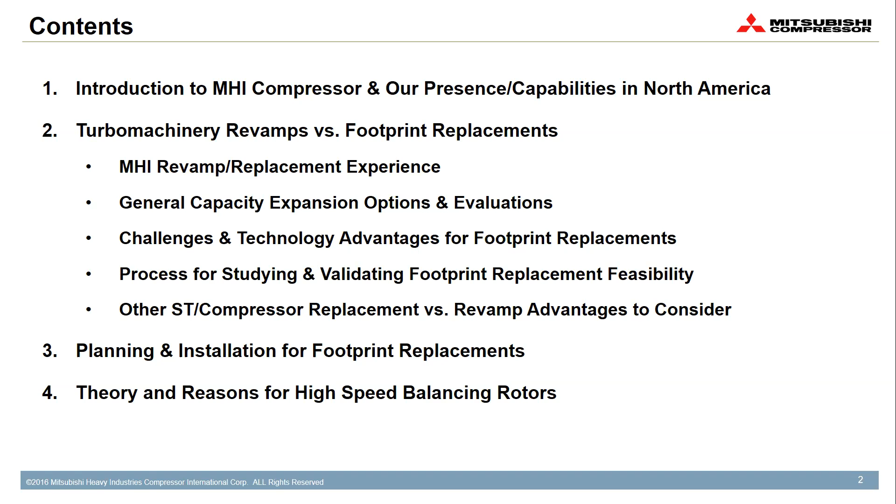All right, so we always throw this up just because Mitsubishi is a large company, but it's a large company of a bunch of different companies. There's actually no Mitsubishi head company. Us, the compressor group, we fall under Mitsubishi Heavy. They've got multiple domains. So we've got the power group, Mitsubishi Power. You may run into those guys. They've got a facility here as well as in Japan.

We've got, like every other big company, we've got government for defense and space systems. We've got our own company that does carbon capture. So they've got their own engineering division. So MHI is really who we fall under, and there's quite a few underneath us.

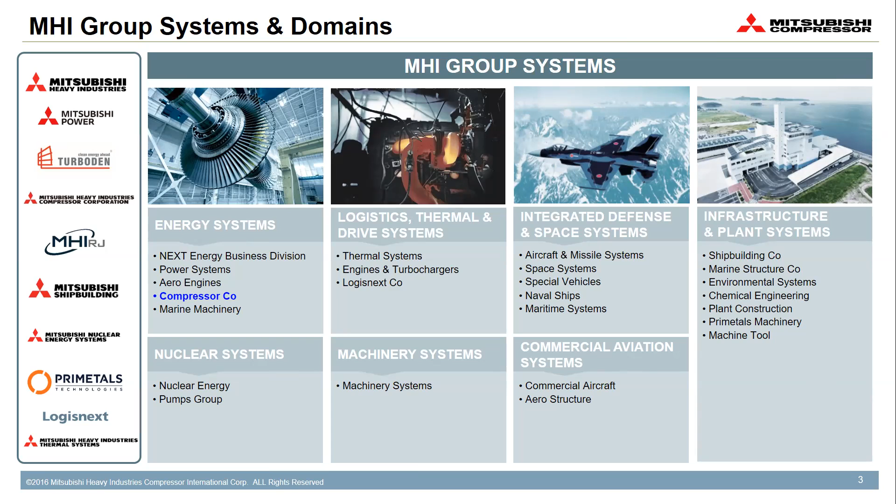All right, so I think most of you saw these out there, but this is what we build. We've got the API 617 type compressors, API 612 turbines, 617 Chapter 3 geared compressors. And as I mentioned, we've got a sister company, Mitsubishi Power, who also do gas turbines. So we do vertical split compressors, we do horizontal split, whatever it may be.

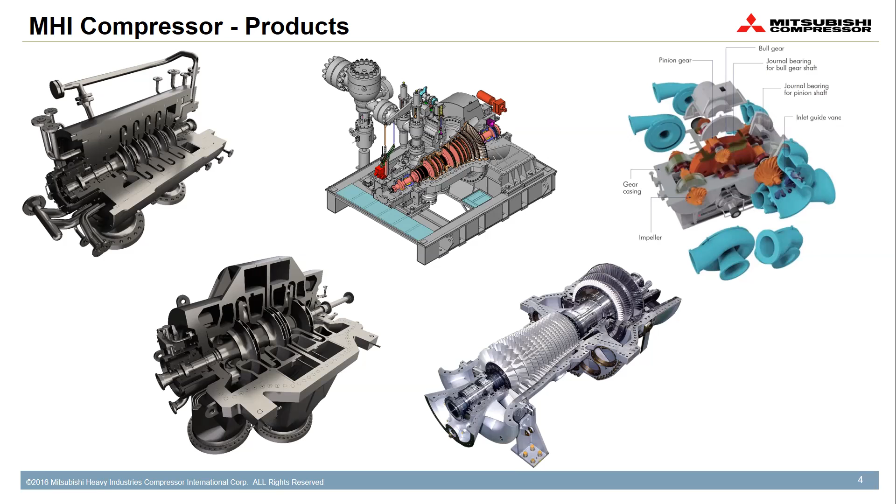So this is really our global footprint. So we've got obviously the factory here in Pearland, which we opened in 2015. Shortly after the big shale boom, we put a ton of machines out into the states all over, but mainly Gulf Coast. And so we had to have somewhere to service everything. So we opened this place up in 2015.

We've got our main factory back in Hiroshima, Japan, which is quite large if you compare it to what we have here. But yeah, so we've got about 860 people there sitting in Japan on the factory side, as well as engineering throughout the plant. We've got in London an outfit for sales, marketing.

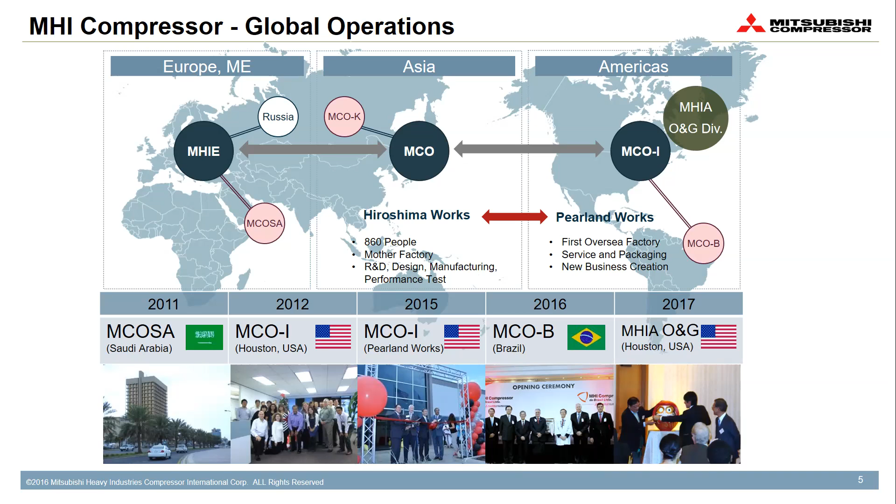We've also got down in Brazil folks calling on people down in South America, and other entities in Korea, Saudi Arabia, and then we've also got something in Russia.

So we're vertically integrated in the sense that from start to finish, we've really got control of our own destiny. But the key thing to point out here is MHI Group has its own foundry. All the MHI group companies use a single foundry that's in Kobe. So we'll get into something a little bit later, but that's kind of the key thing to take from this.

But moving throughout the whole process of building a machine, from the first casting through the machining, assembling, testing, all of that's done under our own control. We like to highlight that because it's a big differentiator between us and our competitors, where most have taken the methodology to start outsourcing a lot of their large castings, et cetera. We've been one of the few OEMs to really hold on to that. It plays into today's discussion because it does give us some flexibility when you're talking replacement of equipment.

Rotor forgings as well, or just the casings? Mainly casings, but we do get from our own company some of the sourcing for the rotors, yeah. So you have forging capacity too.

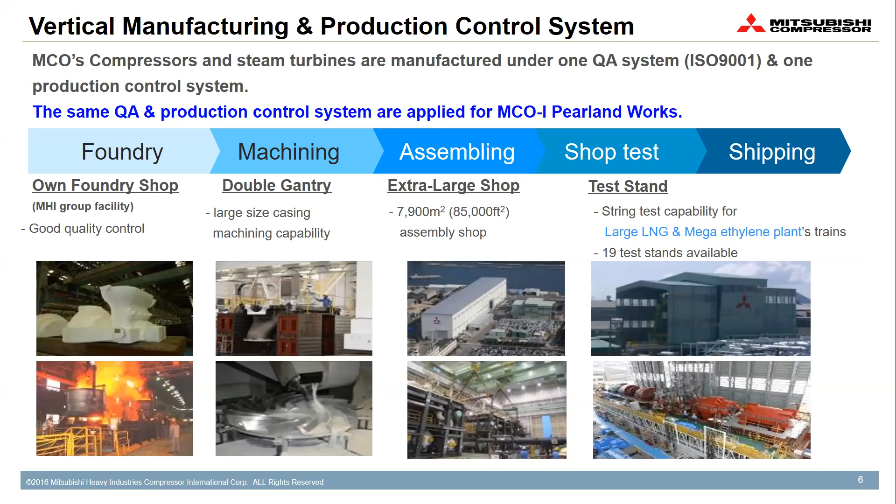All right. Yeah, we've gone through these two here. You saw everything. Kind of just capacity for what we do here. New unit packaging, you saw the test stand. We can do manufacturing on stationary and rotating parts, whether it be steam turbine, whether it be compressor. We're doing repairs, we're doing overhauls on machines, TTV overhauls.

We've got welding capabilities for pipe, as well as repairing the casings and things like that, or the shafts, whatever it may be. Is it any make of trip valve as well? For sure our own, but if a Gimpel valve comes over here, then yeah, we'll take a look at it too. Yeah, we've overhauled one or two Gimpels now. It's important to point out, right? The Mitsubishi TTV design is quite similar to a Gimpel TTV.

Did you have an overspeed? Yeah, so we had impeller overspeed, we had low speed, and we had high speed balance, but above-ground high speed balance. And then, of course, storage was over here for all the big rotors.

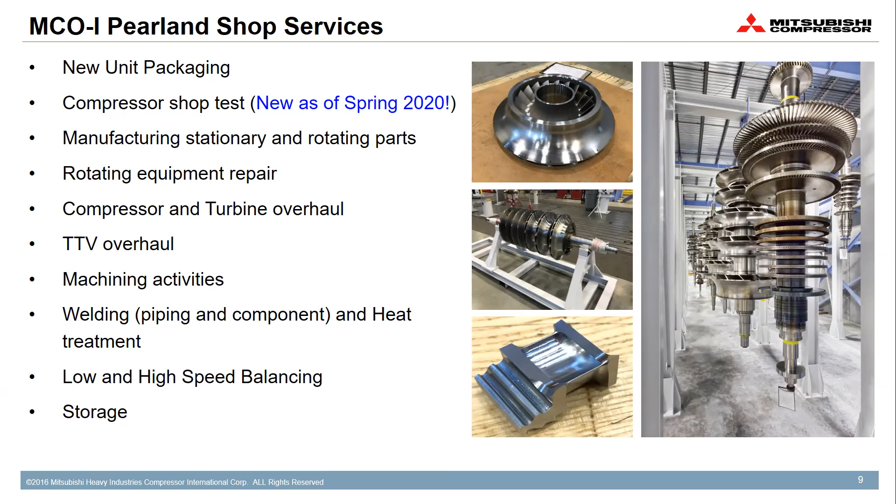All right, so as I mentioned, 2012 was a big boom for shale gas, and that's when a lot of these big orders came out. So the growth was, call it exponential from that time for when we put in new machines. So 2012 to this day, we put in over 200 machines out in the field, steamers and compressors. This is just in North America.

So mostly pipeline? It's ethylene, ammonia, LNG. Those are the big markets we get in. Pipelines, certain manufacturers got a pretty good grip on the pipeline.

Yeah, I don't think we've got the slide in here, but generally speaking, biggest contributor to our business is ethylene and petrochemical. It accounts for probably around 40% of our market on any given year. The next largest chunk is in ammonia and methanol, traditionally for fertilizer. Now we're seeing a shift for transporting hydrogen, but ammonia probably accounts for another 20% of our business. Then the remaining 40% is a combination of upstream, midstream, and other downstream applications.

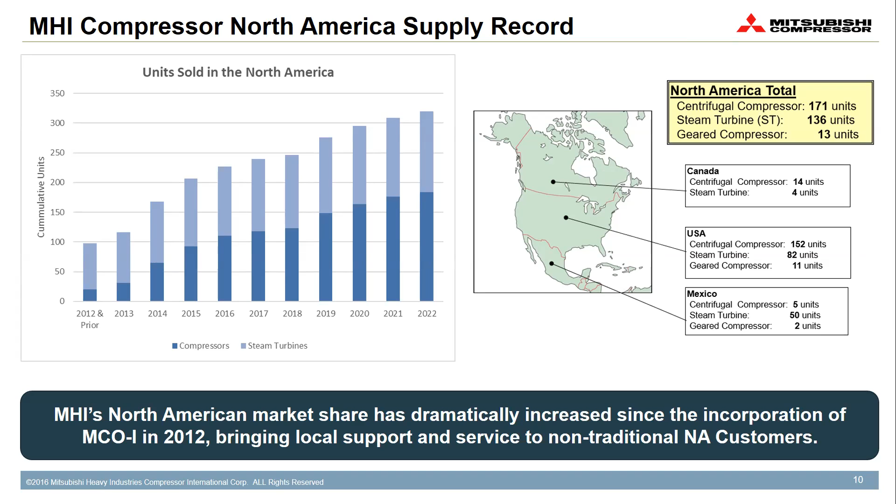So we'll have customers that'll go in and put a 1,000 KTA ethylene plant, and then 5 years, 10 years later, they want to go put another couple hundred KTA. And so they come to us to do these studies, we do internal revamps, or we do footprint replacement, whatever it may be. So they kind of do a staggered procedure for making larger and more capacity.

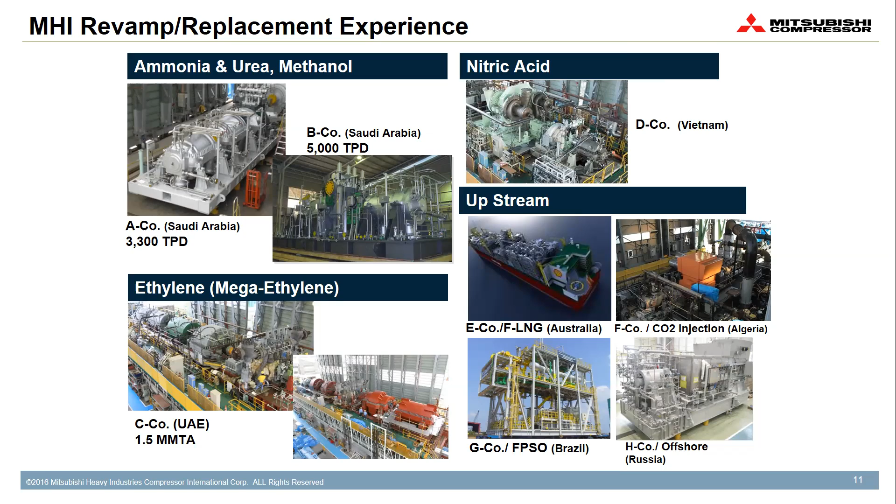Yeah, especially today it's a good topic of discussion in ammonia in particular. If you watch ammonia pricing, it's actually through the roof right now. So you can make a relatively small capital investment to debottleneck a facility by either revamping or replacing your turbomachinery and get immediate return, call it 25 to 50% capacity expansion. Of course, depending on what other bottlenecks you have, but yeah, true.

Yeah, so this is our install reference for revamps and replacements globally. So you'll see the yellow boxes are ones where we've gone and ripped out others' machines and put our own in. That's almost 300. And the ones that we've gone and revamped or footprint replaced of our own machines, it's north of 400 machines. So we're talking 700 plus machines around the world that we've done this type of process.

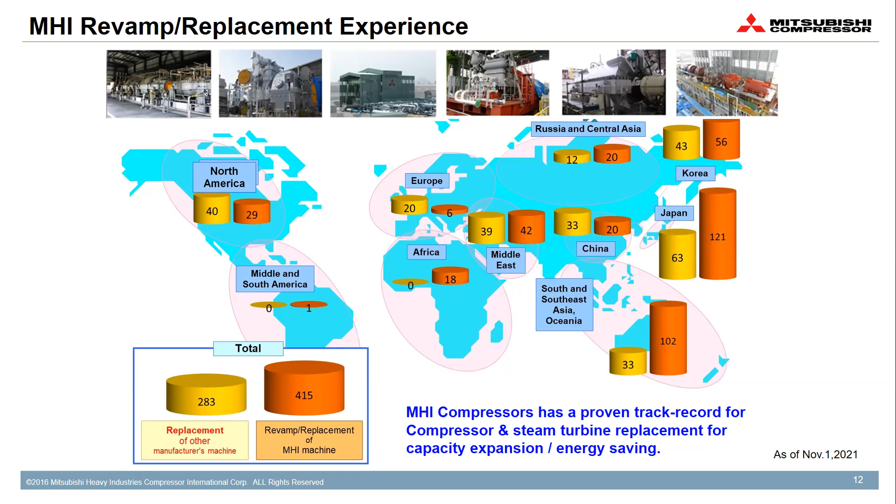What happened here, Mike? This was happening earlier, but they quit. Are you back? You still have us on there? Okay. Some connection loose or something. Yeah. Is it the Zoom or is it the TV? No, it's TV. This was happening earlier. Sorry about that, guys. All right. Some connection loose on the. Yeah.

All right, well, look and read fast, and we'll keep working along. So before we get into the details of when you may pursue a replacement of a machine versus a revamp, because both have their time and place, we're going to highlight there were several major, call it replacement and debottleneck projects in the lower 48 of the U.S. in the last year. Two of the largest we can share with you today, which we were successful in capturing.

This is public information. There's an ammonia plant in Iowa where we're pulling out 2 existing turbines and 4 existing compressors. It's an old M.W. Kellogg design ammonia plant for those who may be familiar. Unique thing about that project is, if you've ever worked in any of those ammonia facilities, it's what they call a topping turbine configuration. So you have a back pressure turbine plus a condensing turbine to get the power you need for that high-speed syngas train. We're actually pulling that out and putting in a new single body extraction type turbine in place there.

So pretty monumental shift for those M.W. Kellogg designs. But the reason we highlight it is because we're able to do so without disturbing the existing footprint and with minimal impact to their piping. And they're debottlenecking that ammonia facility by about 15 to 20%. So they'll have an immediate capacity increase once they go through their turnaround this summer.

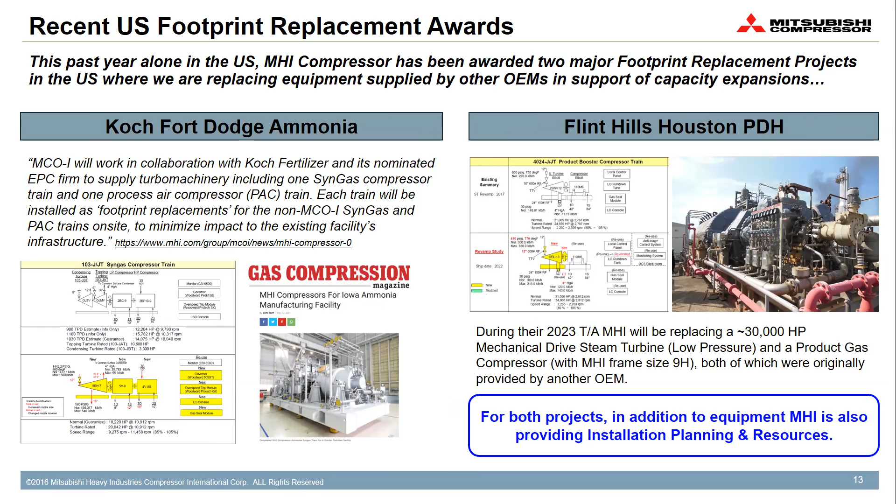So you're replacing with the same technology with the integral gear compressor, or from what the previous? Yeah, more or less the same type of technology. Just with modern manufactured components and added capacity in the existing footprint. So, right, your most monumental constraint when you're replacing a machine is the civil structure and foundation around that machine. So that's the biggest constraint you're working with.

And in ammonia and petrochemical applications, most of those are configured to be mezzanine mounted with down nozzle orientations. And so you've got an opening in a preset footprint that you're constrained to. Well, you can imagine if I'm debottlenecking my compressor 25%, that machine is physically growing in size. Your bearing span is physically growing. So now you've got larger nozzle diameters you're trying to fit within a preset foundation opening. So that's the biggest challenge. So it's more or less the same technology, but with a twist on component modernization.

Maybe take a quick tech break if you don't mind.

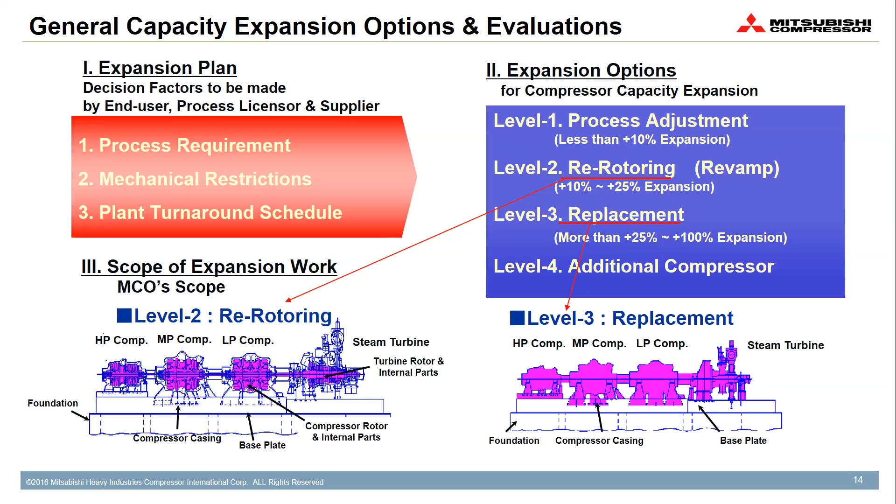What's the timing of either of those two projects we're talking about, the ammonia first, and the PDH unit? The ammonia will be installed this summer, and the PDH one is being installed Q1 next year.

Sorry about the guys on the other side, but I think you're going to end up having to look from just this. All right. How are you? See, there was a question. That was from earlier. Mike, if you're ready, you can start sharing.

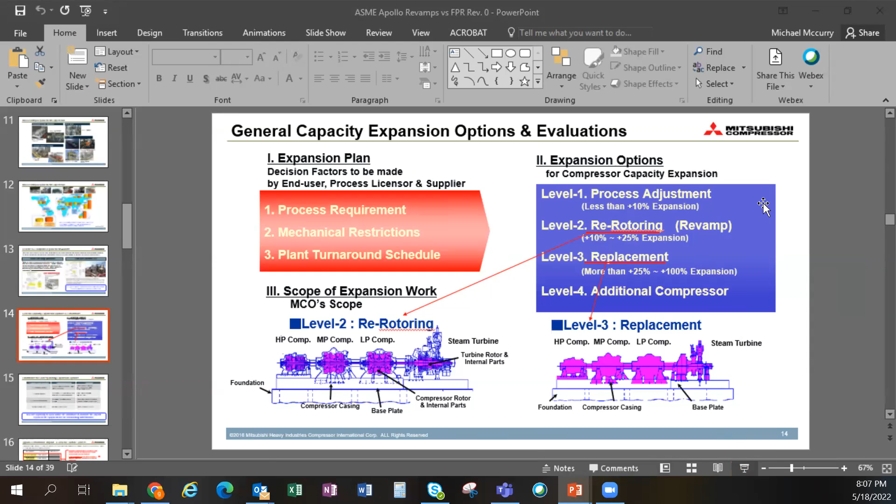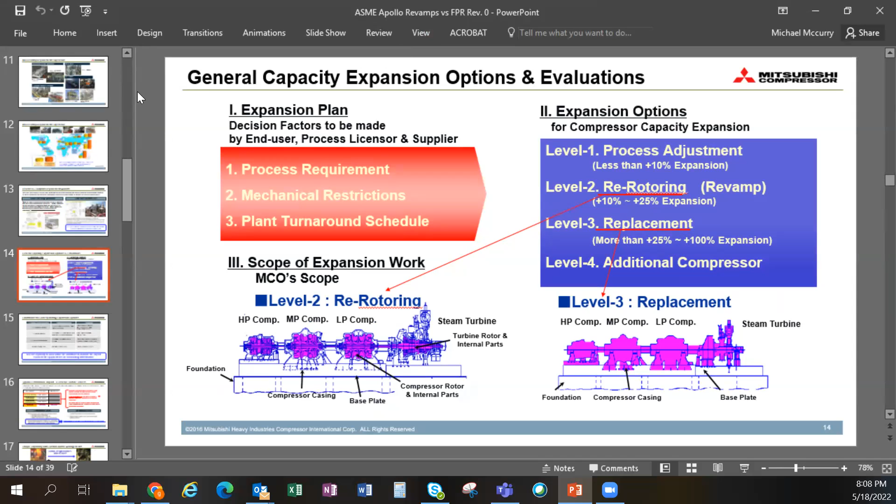You'll get the gist. All right, so for doing some sort of plant expansion, there's things that you're going to look at, right? You're going to look at how you're going to do it with your process, and there's more than just the turbomachinery, but you're going to have to look at what your restrictions are mechanically. What are you going to have for your plant turnaround schedule? How long do you have in case you're going to be doing some sort of revamp? These are the kind of things you've got to consider whenever you're doing some sort of expansion at the plant.

So we've broken it down for turbomachinery into four categories. You can just have some sort of process adjustment, get some expansion out of the plant. You can do an internal revamp. You can do a footprint replacement, or you can buy a whole new train and set it nearby the existing train. So that's what we'll get into here for internal revamps and footprint replacement, how we view that whole process. How long does it take from the time you get an RFQ and have the contract to the time you have your finished product?

Kind of an average. Yeah, I'd say anywhere from 14 to 18, 20 months. It just depends how long the process study is going on and they finalize their stuff. But one of the things Steve will get into is how the process works, where we go out, we do a site walk, we take measurements, and if possible, look at existing drawings, things like that. And so that whole process, depending on site availability, can take a little bit of time. So roughly less than 2 years. Yeah, I'd say so. As long as the customer's willing to move. Sometimes. Well, no comment.

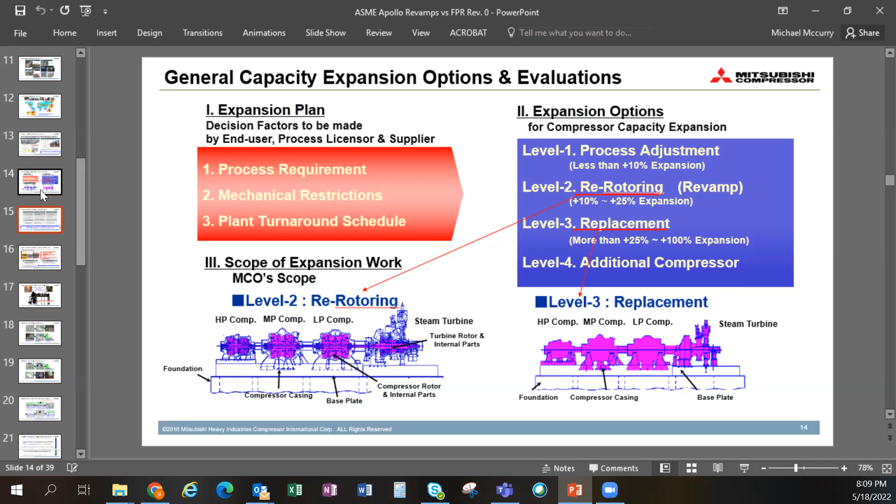So if you're going to do some sort of process adjustment, you can do a suction pressure change. If you've got a variable speed machine, you can speed it up. You can also change some of your steam conditions, but there's limitations that come along with that. So you've got existing casing design pressure limitations. You've got max continuous speed. Every compressor is going to have an MCS, and going beyond there is not recommended. And then you've also got limitations on your driver for the output power.

So if you're going to do an internal revamp, we see you can get somewhere in the range of 10 to 25% additional capacity, just replacing internal elements, whether it be diaphragms and the rotor. But you've also got limitations here. You've got the bearing span, it's already fixed. You've got an existing machine, right? So you've also got your inner casing diameter. You can't grow beyond what you've already got. So that's really the limitations we see for internal.

Now, footprint replacement, you can throw a brand new machine in here, whether it be a compressor or turbine, you can get some additional capacity. But a couple of things you've got to look at is your foundation size, your existing piping. A lot of operators aren't going to want to be moving their piping that's already there, or their steel or civil work. When you start introducing those kind of things, it's a brand new project. It's very, very capital intensive. And so you have to be very cognizant of those type of things whenever you're doing a footprint replacement study.

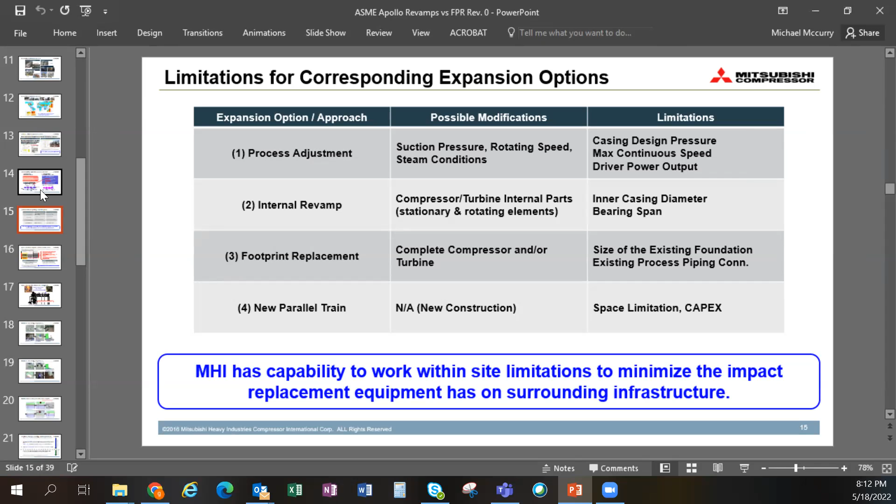Jump in. Yeah. So when you're weighing whether or not you're going to pursue your capacity increase or process adjustment via revamp or a complete footprint replacement, a lot of the times the discussion quickly goes to financials, right? And if that's strictly what you're focused on, an internal revamp is going to beat out a footprint replacement every single time. There's no doubt about that. They can't compete. But the key is evaluating what are your technical risks associated with pursuing that revamp.

I go back to the reference you gave, that fertilizer plant that's going to about 1,300 tons per day. That had already gone through 3 or 4 debottlenecks over its life. So they were starting to push some mechanical limitations of equipment. A lot of times where we see that is in these older steam turbine driven applications. So focus of this slide here is what are those risks?

Commonly, the OEM of the original equipment is going to promote an internal revamp for CapEx reasons. However, in doing so, you're inherently running into mechanical limitations in terms of nozzle diameters, what your pressure losses are going to be, resulting from increased nozzle velocity in those fixed diameters. We like to say that on a very generic level, that will result in pretty much a 3% reduction in efficiency of the machine. So that's one thing to be aware of, as opposed to a replacement where you can come in and really optimize around your new operating point. So that's one of the risks you run into when continuously debottlenecking through a revamp.

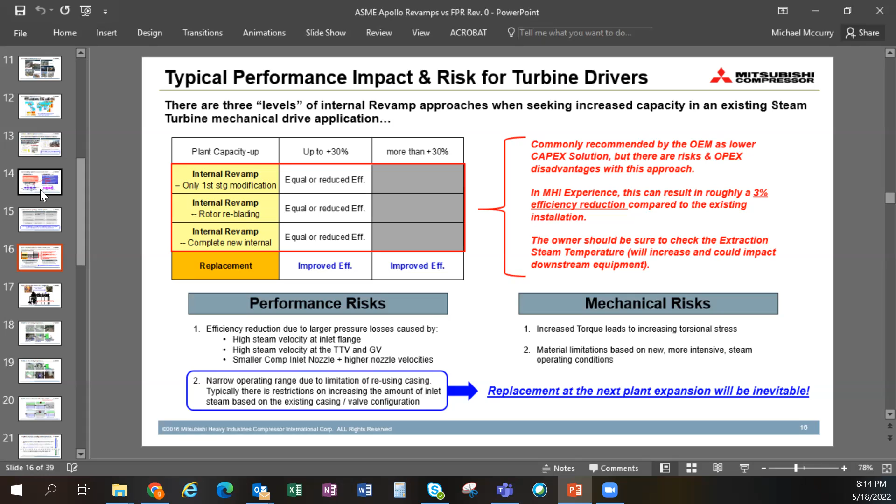That's not how we operate. So Mitsubishi as a company, we opt for what we call flexible frame design. So each casing is really sized for its proper application. And then, with the agreements and flexibility we have with our in-house material providers, we can get pretty unique to work

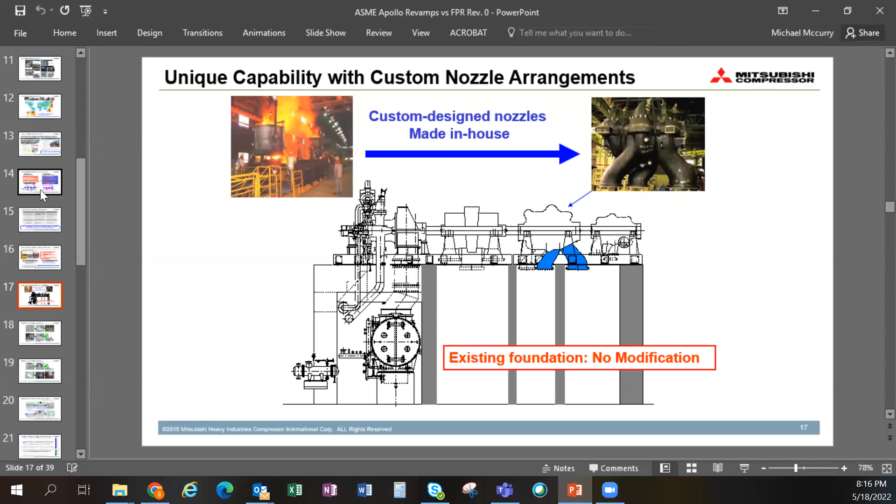within existing foundations. So this is a real example you're seeing highlighted on the screen, a debottleneck of a cracked gas train in ethylene service, where the 3 casings got physically larger. But again, this existing foundation is preset. This is something that can't be changed during a turnaround. So we actually configured the nozzles to span the existing openings and work within those limitations. So again, just a visual representation of some of the unique things we can do.

So the biggest question we get a lot is, okay, your machine's getting larger. Yes, you don't want to touch the foundation, but what am I doing with the base plate that's got that fixed in place? There's 2 ways you can approach it. First and foremost, our goal is always going to be to try and reuse the existing base plate. Why do we do that? For anyone who's been up on a compressor deck, there's oil flying around that can leave the quality of the concrete foundation in question. And getting into a turnaround, chipping out a base plate, trying to chip existing grout opens you up to a whole new can of risk that we generally try to avoid.

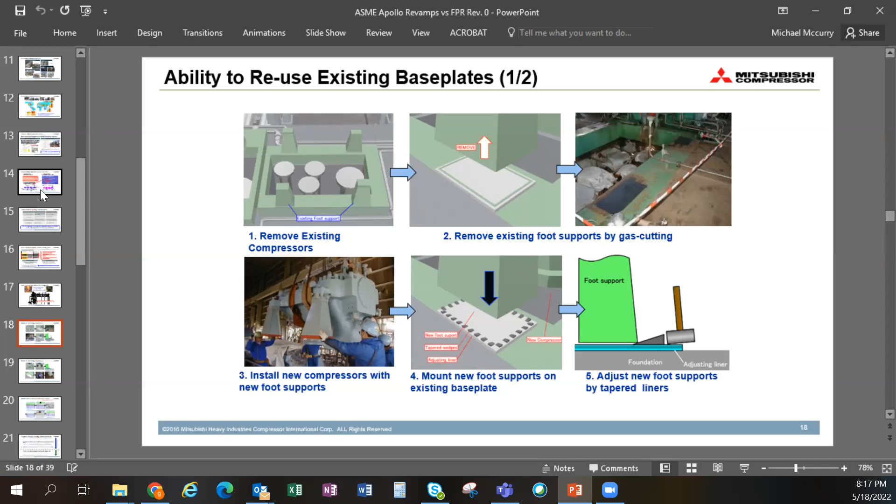So in any footprint replacement we're pursuing, we're going to make the best effort we can to reuse the existing base plate. One of the ways we do that is through a modification of the base plate, a procedure in which we gas cut the existing pedestals and bring in new pedestals. We're removing the pedestals because oftentimes if you're debottlenecking 25+%, your casing is physically getting larger, your bearing span's growing, so the existing pedestals simply don't work from a rotor dynamic perspective. So we'll gas cut them, get in there, new pedestals on. This is something our field service crews here are very well versed in. And the next slide is just elaborating more on that process.

So now option 2, if that does not work, because sometimes it does not, go ahead to the next slide, is replacing the existing base plate with a new base plate. So if you have to, you can remove the existing base plate and chip out the grout that's currently in place. Our first step will be to try and match all the existing foundation holes. That is not always possible. In cases where we have to add some new foundation holes, we'll do a chemical bolt in place to meet the new requirements of the bolt locations.

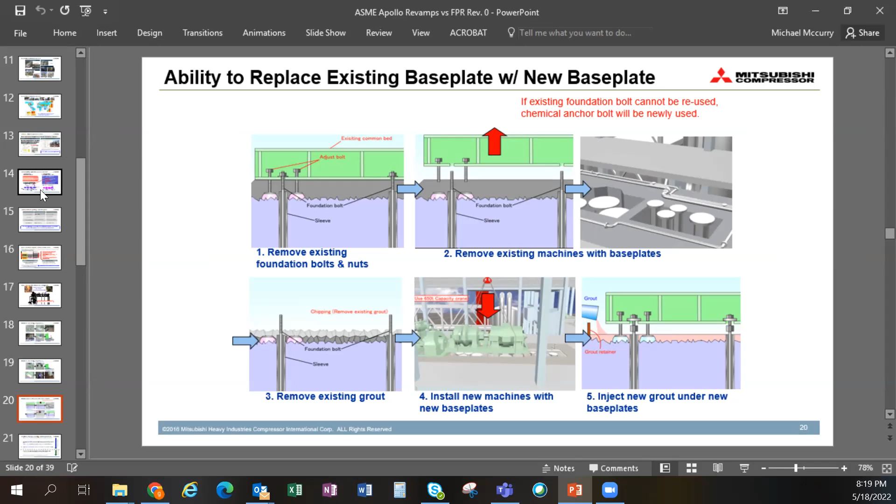So we've got experience with both. The project I referenced early on, that fertilizer plant, there's 2 trains we're working on, and we were actually deploying both approaches. On one of the machines, we're pulling the base plate out, chipping the grout, laying a new base plate. On the other, we're modifying the base plate and putting it in place. The key is we do have experience doing both of these methodologies within, say, a 45-day more or less turnaround window. So it is possible.

So someone asked the question, I think it came from over here, on timeline for getting some of this done. Once the equipment is ordered, how long does it take to finish design and fabricate? Depending on the type of arrangement you have, let's say it's a small motor driven train, that's going to be around 14, 15-ish months today. A large turbine driven application, that's where you're going to be pushing that 18-month time frame. That's from actual order placement.

What we're laying out here is what happens before that. What happens when it's an idea at the dinner table that, hey, we want to debottleneck this plant by 25%. So first we need to understand what the existing process conditions are, and then what the target future conditions are. With that, we'll take a look and say, okay, this is the type of machine you need. But to figure out what constraints we need to work with, we need to have a set of drawings from the owner of what exists there today.

Primarily, GA, foundation drawing, the existing data sheets if they're able to share, and then any supporting auxiliary equipment. From there, we'll produce a technical report with typically 1 to 2 options for replacing or revamping for that matter. Then the next big step, and this is key, is to go actually conduct a site survey.

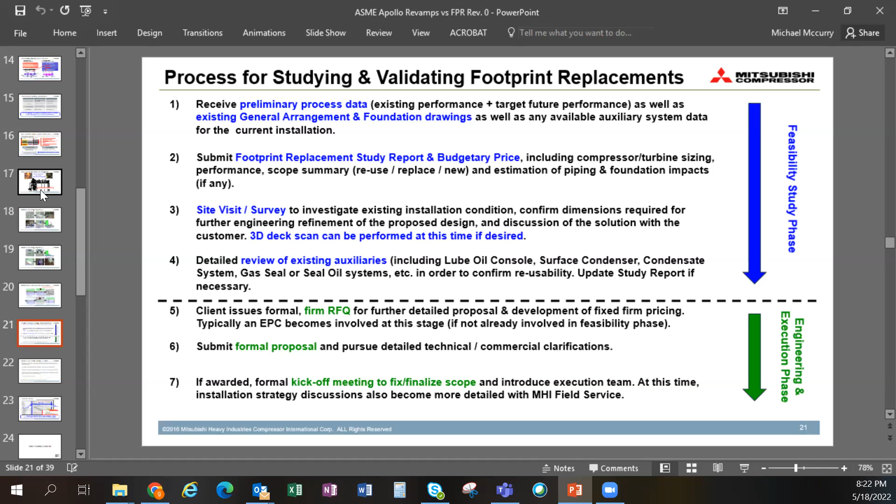All right, so we've talked a lot about footprint replacements and what the benefits are technically, but what are some of the other less quantifiable benefits? And the big one, which we find a lot of customers focus on footprint replacements over revamps on, is when you're doing a new casing, it allows you the ability to validate that quoted performance before you get to the field. Because you've got that casing available, you've seen our test stand here, we showed pictures of our test stand in Hiroshima. It allows you to conduct an ASME PTC 10 Type 2 performance test or a mechanical run test on a turbine. It allows you to validate that performance before your machine ships to the field.

Other major thing is you're reducing the amount of in-turnaround work you're doing. So that core machine shows up typically 2 to 3 months before turnaround. You're doing any prep work, dry gas seal installation, etc., before you're lifting up and dropping it on the mezzanine. Other things we already talked through, design flexibility, etc.

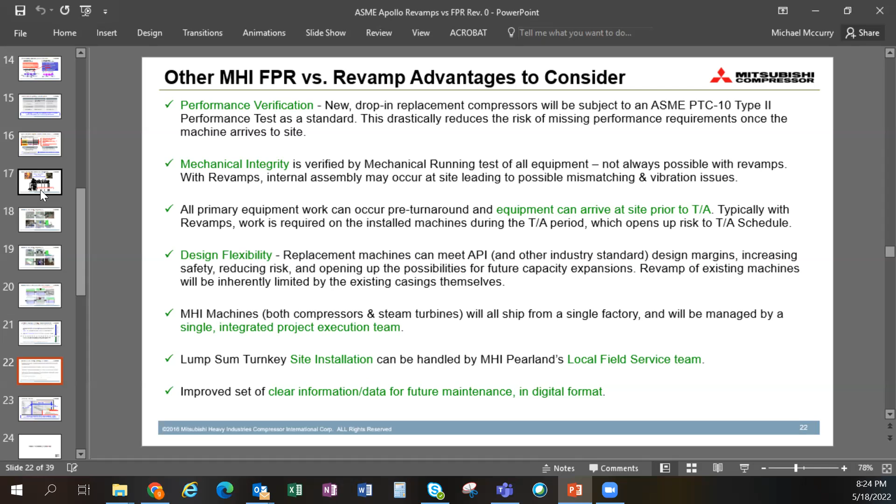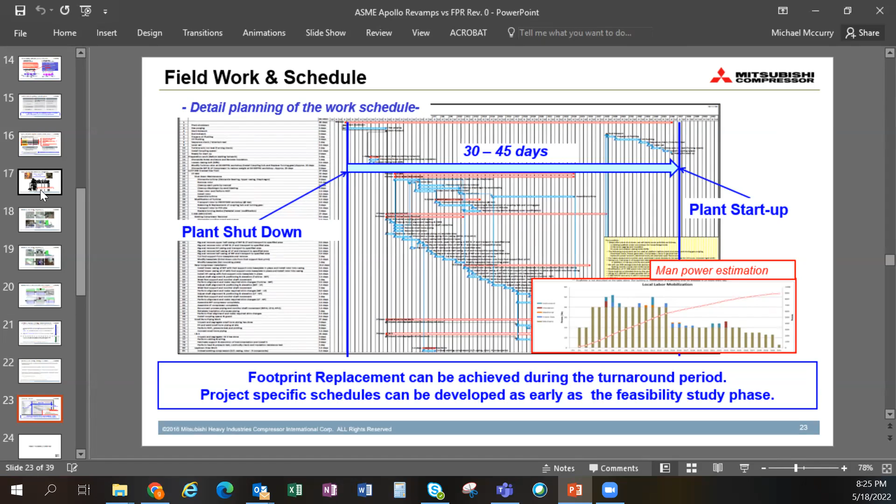The two we showed earlier, two of those trains are sitting at 34 and 38 days target schedule right now. So take a moment to, with that, plug our field service team here that kind of specializes in these activities and provides that type of planning as a service as well. So they'll sit down, spend weeks at the customer site with their planners and their turnaround management, laying out exactly step by step how this machine is going to go in within that turnaround. Okay.

What you got after this, Ellen? Okay.

The two different outages, one being revamp, one being the replacement. Which one is the most challenging? Sometimes you can have a drop in, sometimes you have case modification. Yeah. So I would say both of them come with their challenges. Footprint replacement is challenging, that it's a lot of heavy equipment, right? So sometimes it also comes with piping modifications. Piping modification can be a big no-no for some folks during turnaround. So if that's one thing you're not willing to entertain, then that's kind of a bottleneck, if you will.

The most challenging part of a revamp is not knowing what you're getting into. So some of these casings you're opening up, maybe the first time they've been opened up in 8 to 12 years. And so yes, you think you've got your plan set, exactly what you're going to go in with, the new diaphragms, new rotor, everything's going to fit great because I got the drawings, and you open it up and it's a cracked gas service, which is naturally a very dirty service, and you've got galling on the case or fouling on the case, and all of a sudden, hey, I actually do have to pull this case out for rework at the shop, and that's unplanned in turnaround work.